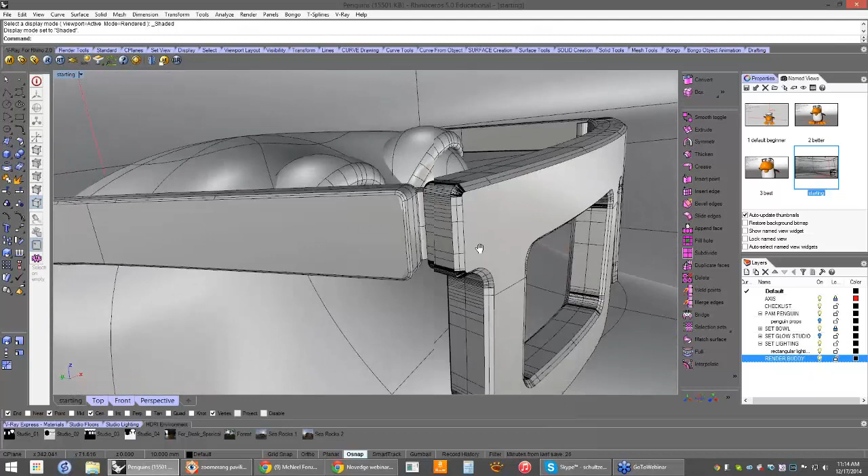For modeling, I'm going to switch to shaded view here, and I want to talk about having edge fillets. This may seem like it's not that important, but it's a very common beginner mistake. You'll see these little chamfers I have—they're not that big, but they're actually critical. Any product that's going to be manufactured will have fillets on it. People may not realize that, but the reason is the tooling would just break or not work, or if it was manufactured, you might cut yourself.

So there's practical reasons, but for rendering reasons, this is what's going to capture highlights. You've got to have fillets or chamfers—either one will do the job.

Okay, the next thing before we render is the presets. I think along with the Express toolbar, these presets are just amazing and a huge time saver. So let's go back over to the V-Ray options—these are located up here. This is brand new to V-Ray 2.0, and they've been improved with some of the service releases as well.

So we have presets for camera, interior and exterior. I'm going to ignore all those and only focus on general. The rest of those settings I've got a couple things memorized, and that will do the job.

So general will control quality, and if we do a quick preview, you'll notice this will be done literally in seconds—I don't care how complicated your scene is, this will go really, really fast. And a lot of the time that's just fine to get a feel for the camera setup and angle, and maybe the lighting. You don't really need finished quality to do preliminary tests.

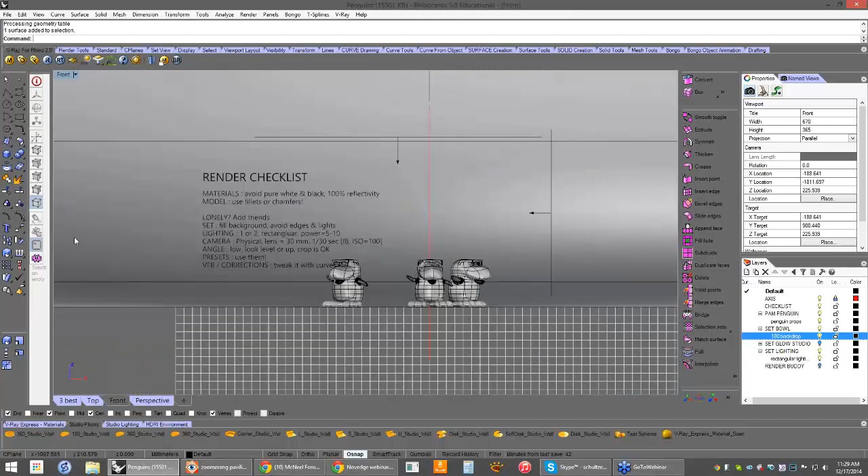The other thing I want to mention is the lighting. There's a couple things that control the lighting. Actually, let me jump back here to perspective - this might be an easier way to see it. So you'll notice I'm using just rectangular lights.

This is by far the best way to go. I notice beginners sometimes use spotlights, which are the cone-shaped lights. I find those a little bit too harsh, and these rectangular lights look way more realistic. Also, the bigger the light, the bigger the highlight - you want that highlight to wrap across. Imagine this light if it was just a very small rectangle, a square, or even a point.

You would get an equally small point reflection, so that's not going to work for most objects. You want to have a large source. You get a large reflection that wraps around the top of the character or object, and you get soft shadows. So it's all fairly important.

The other thing is placement and power. You might have noticed I've got this light selected. If I go over to the Properties panel and select the light, this comes in as default 30, and a lot of people don't even think to check that number. So I always put mine around 8 or 10 for the key light.

Equally important is your fill light, which is on the side. I make it half that. This is a great, simple rule of thumb to use. So 8 and 4 will usually work really well, but I could live with 5 and 10.

So let me talk about the placement. We talked about the power and the type. You'll notice that this rectangular light seems a little bit close, so let me explain what's going on here. If we have a light, it decays over distance. Obviously, that's what makes it look realistic, like the real world. So what's going to happen is if it gets too far away, we lose that effect.

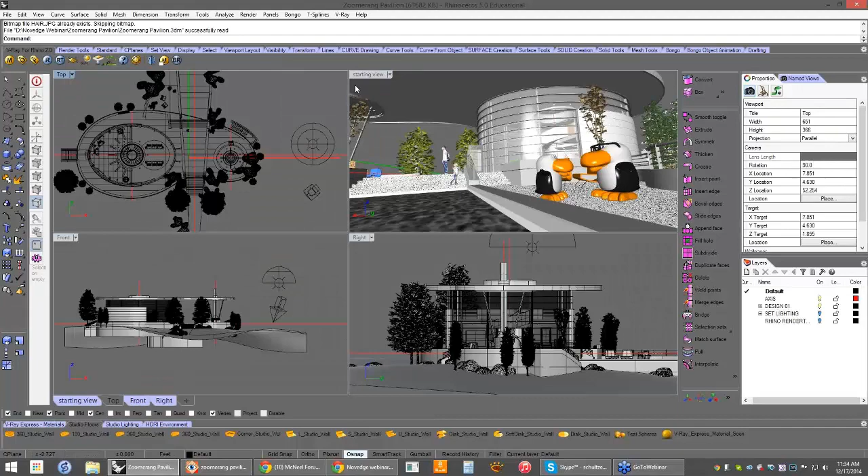One thing I've noticed is in architectural scenes, you can actually avoid putting fillets. I talked about how important they were. With architectural stuff, you can actually get away with not having fillets, and the reason is you're just not as close. So looks like our scene is finally opened up.

So let me show an example of what I'm talking about. We're going to come over here to one of these doors. Notice these are pretty sharp. I'm actually going to switch to a shaded view here—this might speed things up a little bit for everybody. We'll do some renders of this so you'll see all the final texture maps. So notice this is pretty sharp—there's no fillets whatsoever. But I'm not going to render this thing standing an inch away.

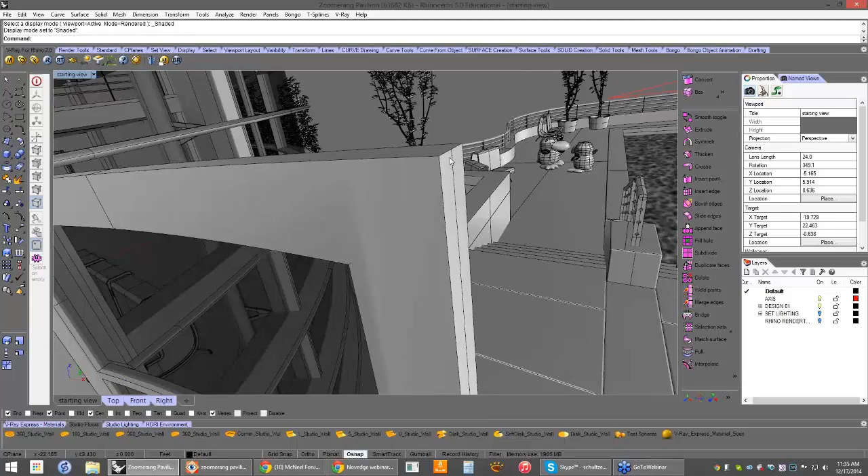Typically I'm going to be moving to eyeball level, and we're going to see it in the distance, and there'll be reflections and shadows, and that will work just fine. I wouldn't put fillets on there unless you needed to. I do have a technique for that coming up.

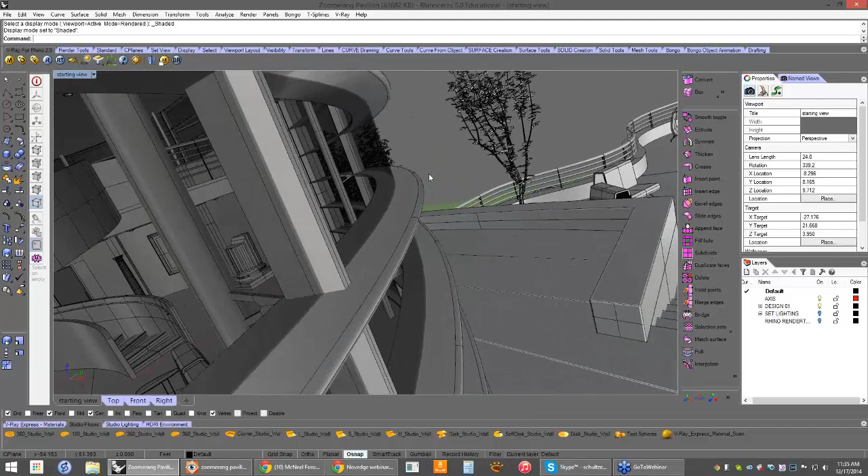Now, alternatively, there's this mullion right here, this horizontal mullion. That was pretty important. I wanted to get a nice highlight on there, so I did put a large kind of blend-type radius on there.

So this is called, if I didn't mention it, the Zoomerang Pavilion. This is a personal project, designed pretty much just as research and for the Lynda course, trying to do something crazy.

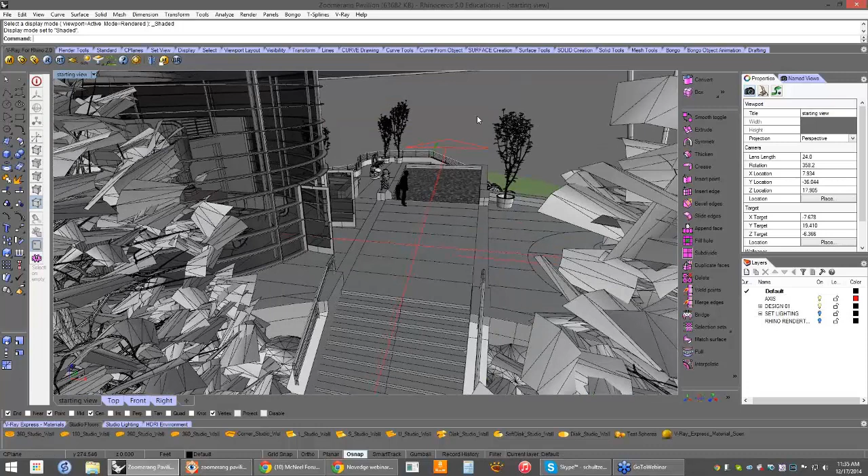The other thing we mentioned is the fillets, and also I'm going to call this just being sloppy modeling. I'm usually pretty careful with product stuff, but for architecture, most of the stuff is going to be hidden, kind of like on a studio set. So you'll notice if we come to the bottom here, there's just a lot of junk floating all over the place. That's totally cool.

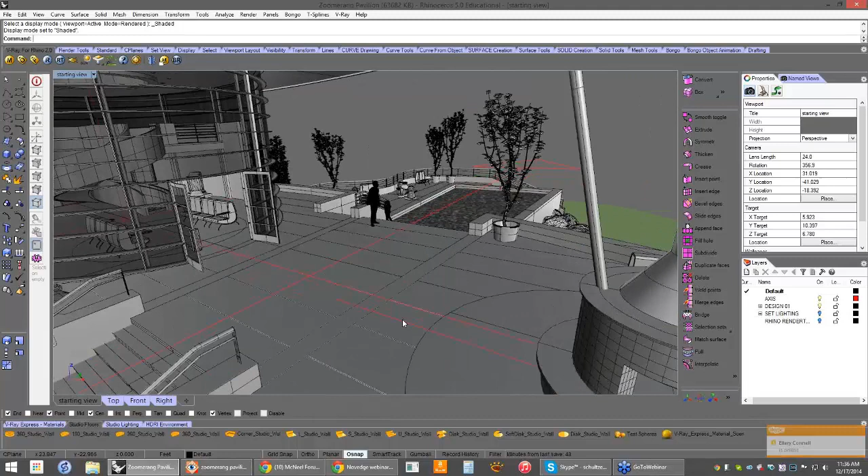If you don't see it, don't sweat it. You can save yourself a ton of time. I don't need to make everything nice and tight. You're not going to build typically from these files, so you're only concerned with making them look fantastic and render well.

One of my other modeling strategies is you should set your rendering up, have it look good, but you can do so much more in Photoshop in what's called post-production, and I'll show you examples of those. We'll be looking at a lot of renderings, but it's going to be towards the end.

If you want to change the intensity or add a different background sky, or even put streaks of light from the sun, all that stuff is best done in Photoshop. So you definitely want to work smart, not hard.

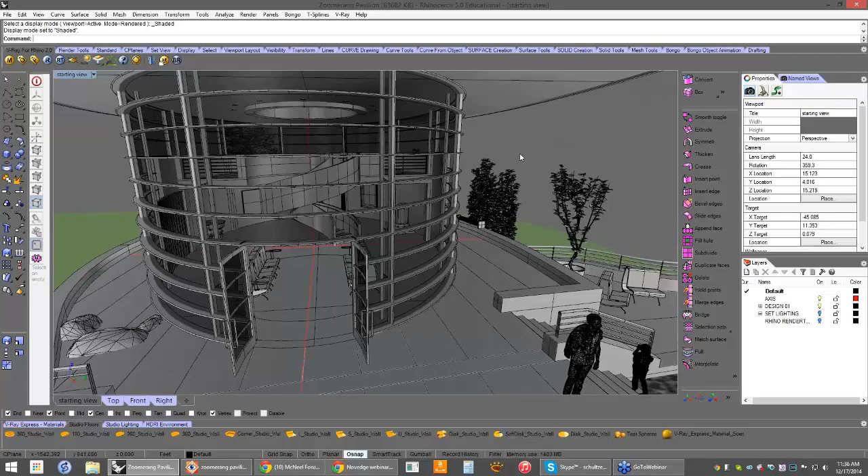Now that we've got the tour done here, let's talk about some of the V-Ray settings I'm going to be using to render this. Let's go back to the options here. We've got the same group of stuff.

However, I should probably talk about the lighting first. I'm using the V-Ray Sun. This is one of my favorite ways to do it. We actually have another method coming up, but this is very fast and accurate. So this is the sun, which is enabled. I want to make sure that is on.

This also works with two separate maps. The way these work is you want to make sure it says texture sky. There's nothing to see right there, but these three work so well together. We're going to have this sun which we can control and move, and then we're going to have a fairly realistic sky. It'll be up to you. There's other ways to do it if it's not to your liking, but I think for most preliminary and maybe many final renderings, this will work great. So I just want to mention we're going to be using that.

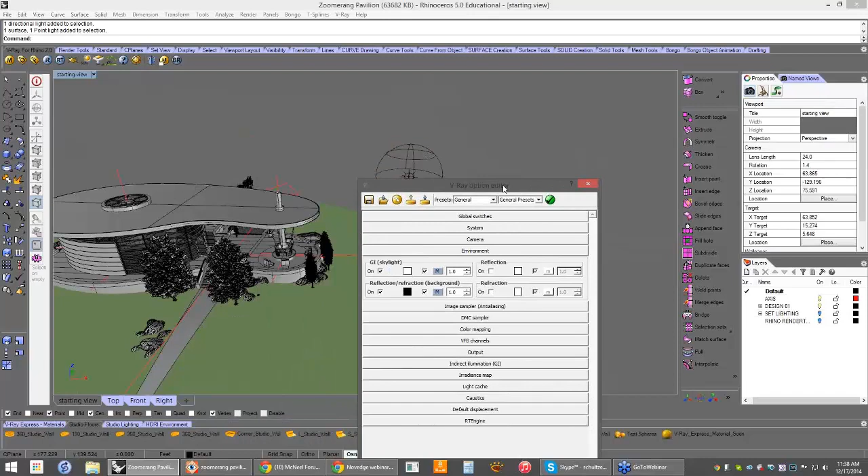Later on, we're going to be talking about this dome light. I want to make sure that's turned off now, because I only want to use one sun at a time. This is a little more advanced. So we've got the V-Ray sun.

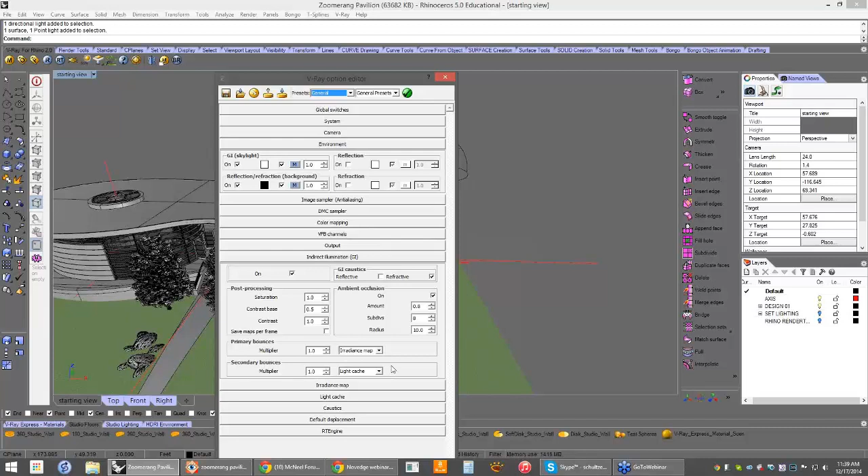In the prior renders, we were using—if I didn't mention it, it doesn't matter because it was under the defaults—the two render engines, which were Irradiance Map and Brute Force. Those work great for interiors. I didn't mention it because those were already set, but for architecture and exteriors, I'm going to use the same first engine, Irradiance Map, but the second engine I want to use Light Cache. This will actually give us a much better result. We're going to have hundreds, if not thousands, of light bounces, and in interior-exterior, that's what really takes you to the next level. So I recommend just sticking with these two engines for all architectural work, and then use the defaults for the interior studio stuff.

Some other settings we can talk about is the camera. Again, we're using the exact same stuff: f8, film speed 100, never change them, leave them alone.

The shutter speed, though, I've sped up greatly. So you'll notice that when I was in the interior, it's about 30. When I'm exterior, I'm about 300. These are two nice round numbers. I may go down to 200 depending on what I'm looking at, but those will get you by almost all the time, at least when you get started.

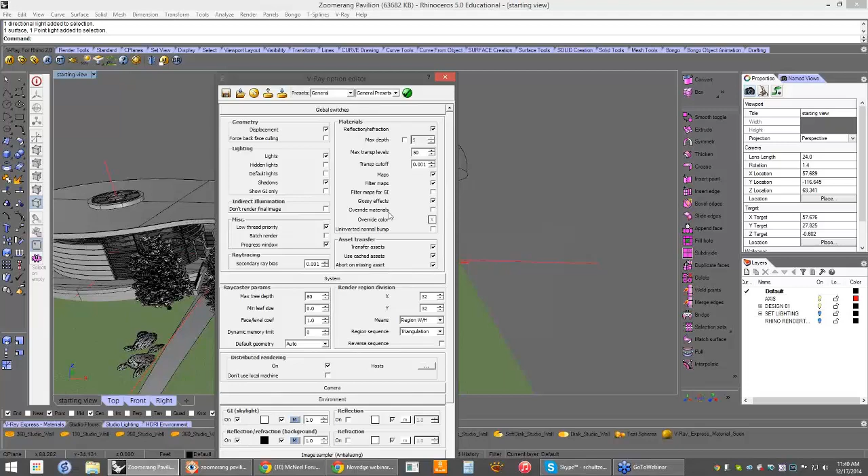Finally, I want to talk about one of my favorite new commands before we render. This is called Override Materials. Most people never even look here, and it's typically off. If I were to render this scene right now, it may take 15-20 minutes to give a nice, high-quality rendering. I'm not going to do that right now. Instead, I'm going to turn on the Override Materials, and what that means is this color has been substituted for every material in the scene, every single one. Therefore, we can get renderings in seconds instead of minutes or hours. This is actually quite powerful, just like the presets where we went fast because that was pretty good just for the camera and the light.

This is a very similar, tremendous workflow enhancement. I do want to point out that you can, on a case-by-case basis, have that override not affect some materials. So I've got the glass not overridden, because I think it'll be a little more interesting to see inside the building here. That's the only one. Everything else should be the same kind of flat gray color.

These are architectural scenes with a lot of detail and a tremendous amount of texture maps. But by using the override, we are going to get really fast results. I'll just get it going here. I think we've already checked pretty much all the settings needed. And you'll notice this is just ridiculously fast. I mean, this is halfway done right now.

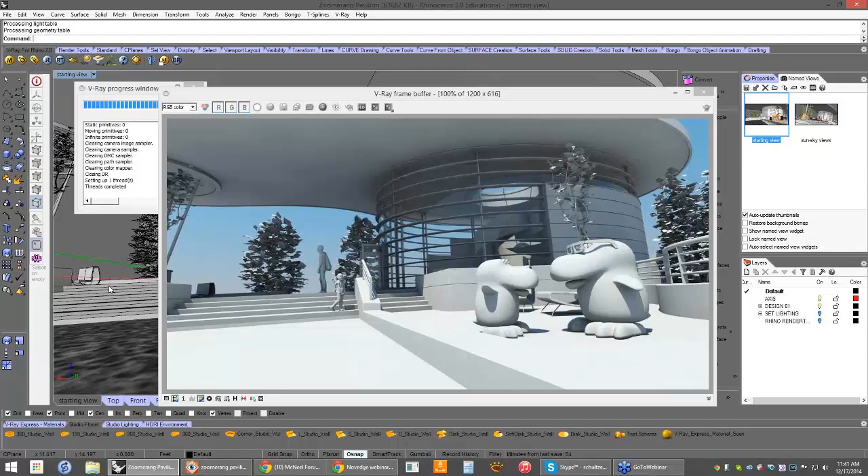It looks like those settings we discussed are pretty darn close. You can actually make some slight tweaks here. For example, I think I still have my curves on. I'm going to turn those off. So this is the render as it comes out, kind of untouched. This is right on the money. I've been surprised once I've learned these few little settings how well this has worked — pretty much just modify that camera for interior and outside, and then it works well for almost any environment.

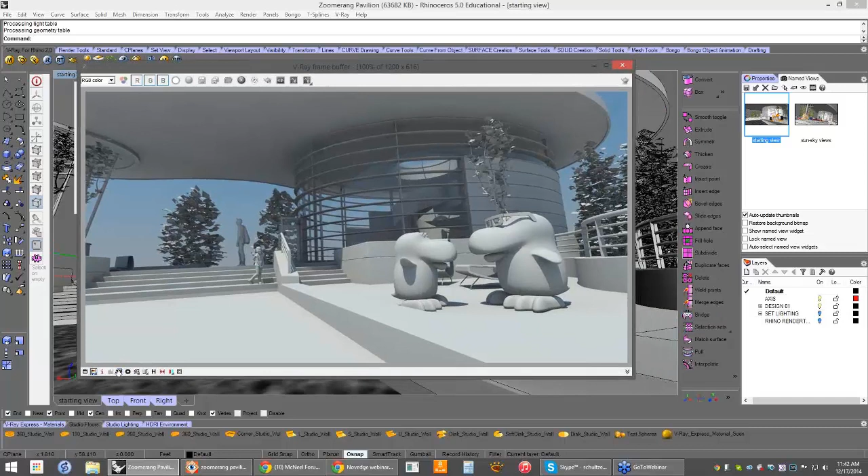So that's the material override. One thing I want to mention, since we were just looking at curves, is for exterior I tend to use levels. Let's open that up and explain what's happening here. I'm going to reset all of these so they're back to neutral, nothing's been modified. I'm not going to even use the curves — I tend to use those inside. I'm using the levels, and that is this dialog right here. Looking at the image, it's the same situation we had before. To me, since I've done this quite a bit, it looks really nice, really accurate, but a little flat.

You'll kind of agree with me after I make the change. So just like we used the curve, this is actually easier. We're going to make the brights a little brighter and the darks a little darker. We're going to move that information into the viewport. Super easy to do. So here's the after, here's the before — you can really pop stuff. I call this poppage, and that might save you quite a few renderings just trying to get it perfect. You don't have to; you can just use these enhancements. That's how people would take a photograph in the real world, and that's how they would edit in Photoshop. So you're just using the same techniques. It's not cheating — it's working smarter, not harder.

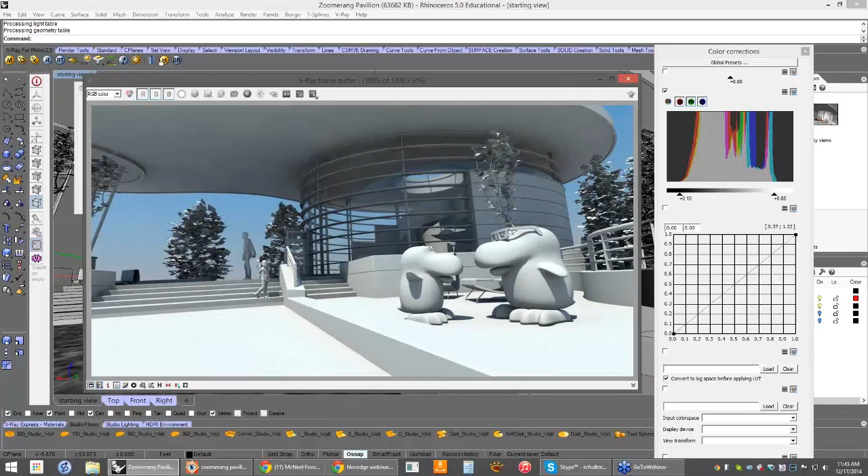Okay, typically if you're in the middle of a project, you have a lot of materials, and we took a peek there earlier. But let's say we needed to edit something, and I don't even remember what I assigned to, let's say, this chair. What material is that chair in the scene? So this is really cool — a brand new command that just came out in the latest service release. It's called Edit Material. I also call it the Quick Finder.

So when I click on this, notice that it's actually asking me to select it again. I did it in reverse order. So it jumps to the material editor — if it's closed, it'll open it up, and it goes straight to the material right there. So I can make changes to that, make little additional tweaks. It'll do that for any material in the scene, anything you can select. For example, here is a wall, and I can just do the same thing right now: select on the wall, right click, and then it should jump to it.

So you get the idea. I'm not going to... I think I've clicked too many times in a row, it's locked up a little bit.

Okay, so that's the edit materials, the quick finder. Very handy, especially as you saw when I had, who knows, maybe 50 materials. This is especially helpful with people who aren't very good about naming. That's one thing I recommend, is have stuff that's logical. I see too many students with default material 1, default material 2, all the way down to like 40 or 50. That's just crazy. I think that's no fun at a certain point, figuring out. It's too much of a mystery.

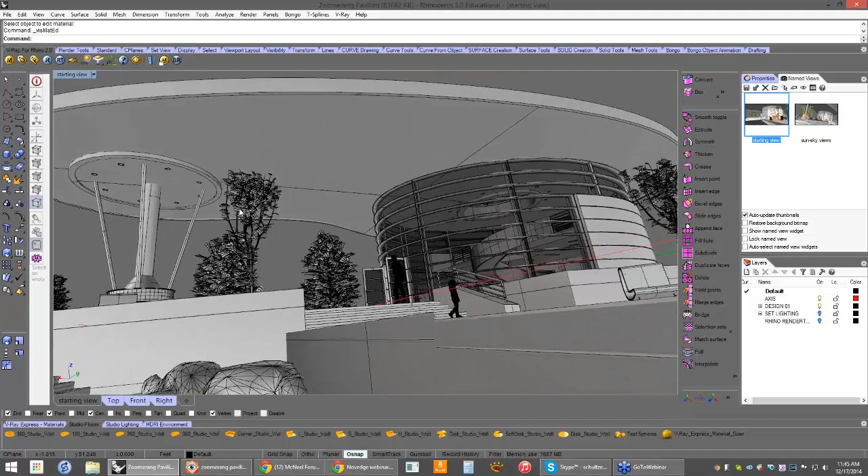Okay, now another really cool feature here, and I'm going to have to kind of jump outside of Rhino and V-Ray to show you, and that's this setting right here. It's called Guess Lens Shift. I want to give you an extreme example to highlight what's going on. This would actually be way more noticeable if we were looking at a high-rise building. Typically, in perspective, things get very small and pointy as they get higher, right? It's convergence of the verticals.

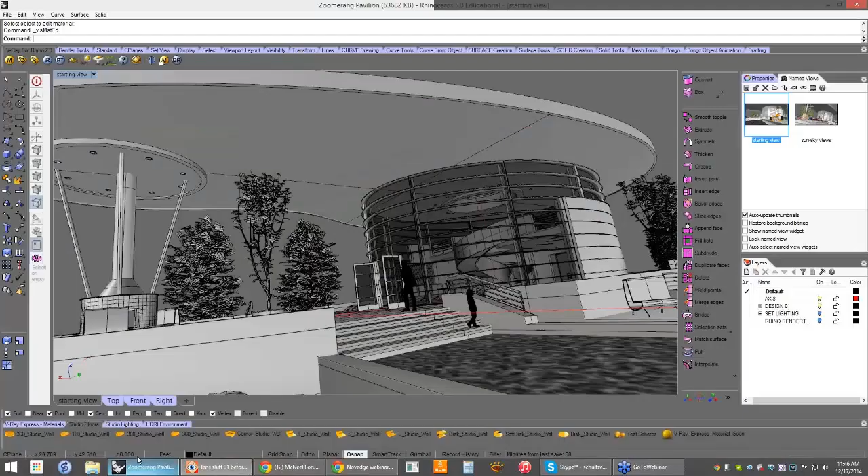Okay, so I'm going to jump over and just show you the before and after of how that works. This is called lens shift. Let me point out where it is first. So right here, here's the button, Guess the Lens Shift. It's going to become more dramatic as you have wider angle lenses. You could actually do that, maybe go down to 20 here. Hopefully you can see now that these vertical lines are converging. They're meeting pretty close, as opposed to where we prefer them having been more parallel. So that's what that command will do.

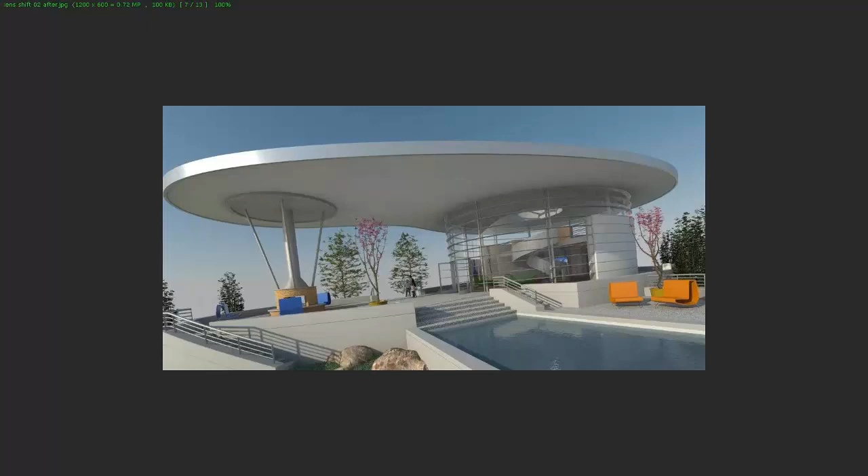You don't notice it in the viewport, it only happens when you render. So that's why I have to jump over here. So here is the before. We did the Guess the Lens Shift, and the next image should be after. So that's corrected - it looks a little skewed just because we're jumping back and forth. So that's the before, the lens shift, and that is corrected afterwards. I think that's a little bit more pleasing architecturally. A lot of photographers who take pictures of real buildings will want to do this in Photoshop, so now you have a tool inside of V-Ray to do that as well.

Okay, then last, for the render scenes here, let's get this out of the way. I'm going to go to a named view, and I want to render this view and show you kind of the alternative to the V-Ray Sun. This is the built-in one, or I should say the oldest, and it's kind of more standard.

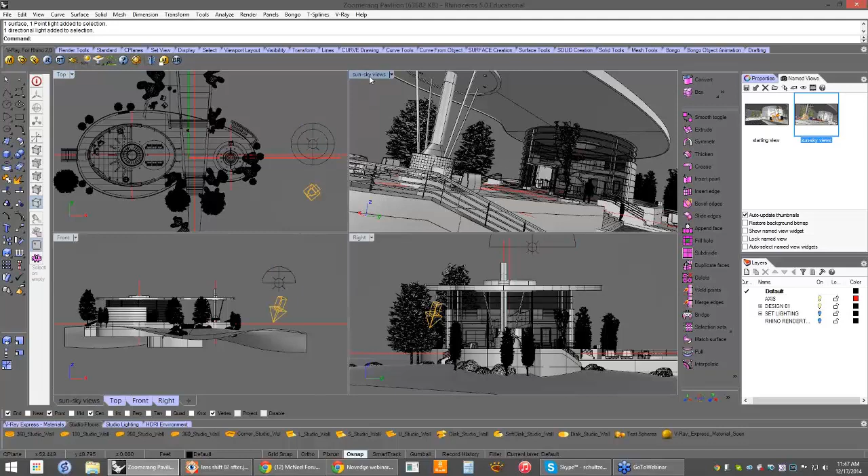Let's go ahead and render this scene with the V-Ray Sun, and then we're going to talk about the new and improved dome light and the differences you can expect from that. So I've got this highlighted, let's do a quick double check - this might be useful. I want to make sure my environment, that's got the settings there. Check my camera, a 1 to 300th, that should be okay or pretty close. I've got my output, double check that to match the viewport. That looks about right, I think that's it. That's pretty much 300th, I leave everything else alone.

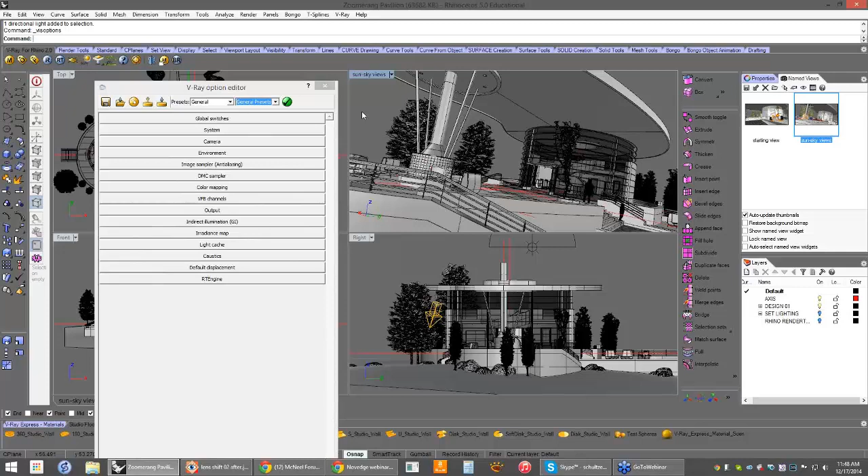We can double check the presets. I'm going to go very low just to keep this thing moving. That material override, though, is one of the things here that is really speeding it up. So you'll get to see the final renders here towards the end. Let's go ahead and render that.

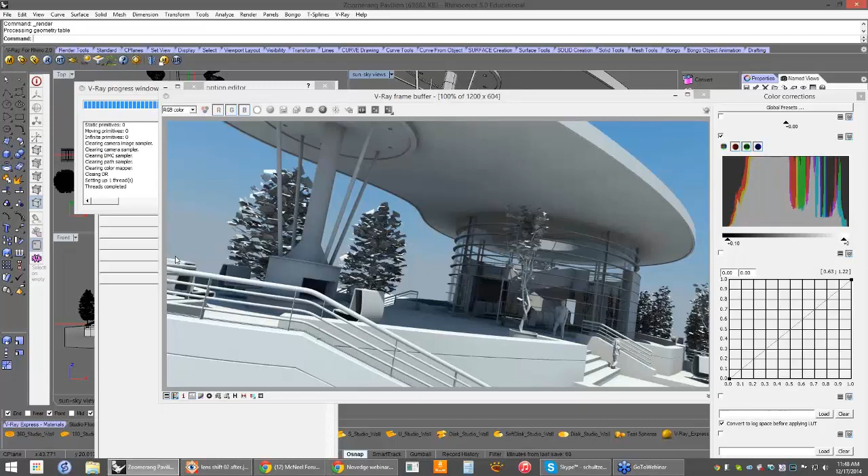So again, this is kind of a before and after. This is, of course, our override - I already discussed that, except for the glass. That's why it's rendering so fast. We do have the combination V-Ray sun and sky working really nice, that blue is really popping. I don't think we're even... yeah, the levels are being used there from the last rendering, we can turn that off. So that's just going to be a comparison render.

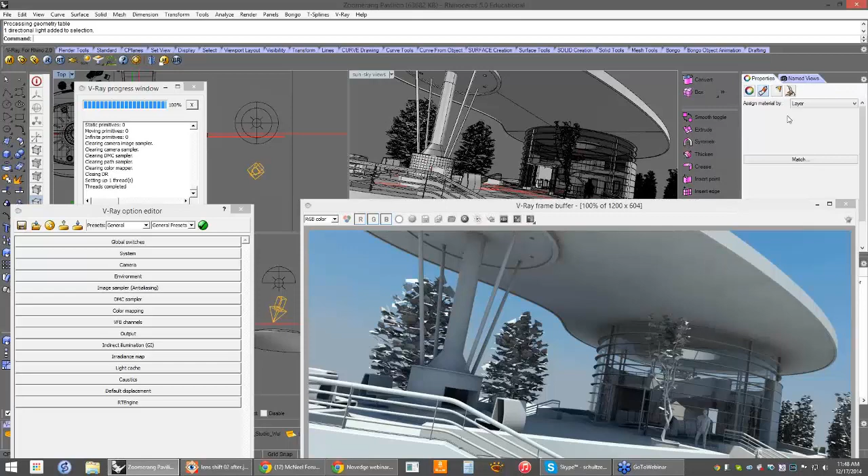Let's talk about this new technology. First, I'm going to take the V-Ray sun and turn it off. Let's do that, pretty easy. I'm going to select the sun there in the scene, go to the light, and just turn it off. It's off. However, it is connected to the environment stuff, so I'm going to turn off those as well.

These are not needed, so that includes all the light and those specialized texture sky maps. Done, those are fixed. Now we're going to talk about the dome light.

These are both on the V-Ray panel here under lighting, you can find them. What's amazing is that once you put it in the scene, these are icons, so it doesn't matter where they go, just make sure they're not upside down. So those are in the scene anywhere, simulating the sun millions of miles away, so it's not a problem where it's located.

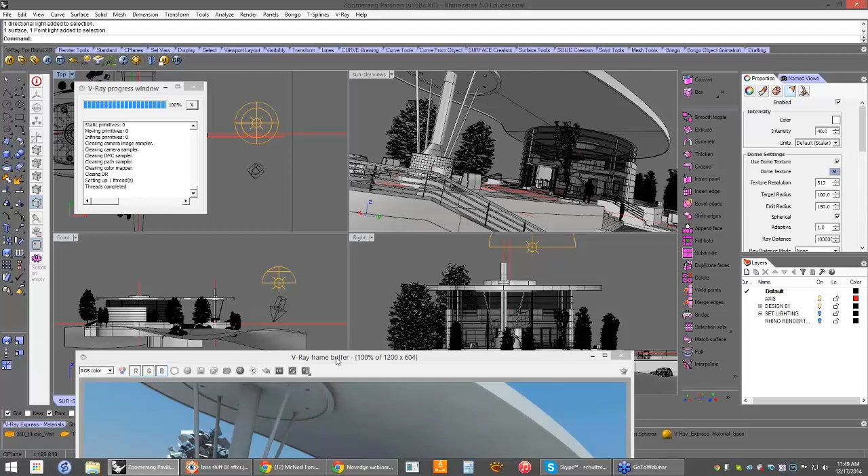But let's talk about the settings here before we do that next render. I'm going to enable this. Now we can apply a texture map to this dome. So what happens is we're doing multiple things at the same time - we're providing a source of light, and also a source for the background. This can get really amazing and very realistic.

Let's take a quick peek at the texture map here. It's just a standard bitmap, nothing special. It is an HDR format, which contains a lot of extra data - high dynamic range compared to your average JPEG. This is how it looks, a little bit dark right here, but that's fine, we're actually looking at a tiny slice of it. It's wrapped around this entire dome. So you just think of this as like a window on your house - you're only seeing a small section.

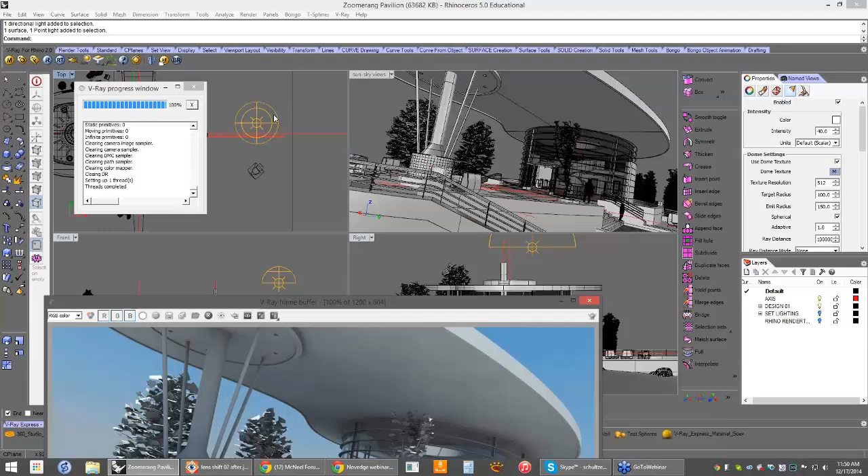Okay, so we've got that activated. One thing you want to look for when hunting or purchasing maps is that these guys are high quality, so that the sun - there is a sun on this map - can cast a shadow, and we'll see that happen right now. Let's go back to that saved view.

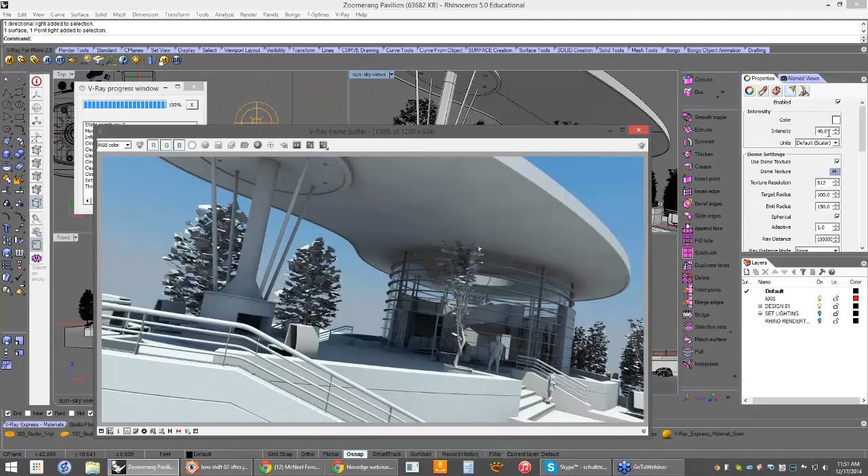It does take some trial and error, though. I've used these HDR maps anywhere from a value of 1 or 2 all the way up to 40 or 50, so a little bit of trial and error. It depends on who made them and how precise they were.

Okay, let's, without any more discussion, just render this. I'm going to use a little bit of a shortcut this time - by clicking on the teapot, I don't have to go over to any of the other menus. So this should go pretty fast. The dome light will be slower in general, just because it's a little more data.

But what's saving the day here is the override material. Now this looks a little darker - that's perfectly normal. We can make a very quick change, but you'll notice the scene suddenly looks like it's somewhere besides a computer. You'll notice we got the sky. The sun is actually to the right behind my shoulder.

But what is a mark of a great HDR lighting map is you can see sharp shadows. There's actually just a spot on this map that represents the sun, and it is casting light strong enough so that your shadows show up in the scene. That's pretty nice and something that's really critical. Notice how this shadow here is from the roof edge, which is farther away, so it's actually softer. It's another huge thing to look for and another step up in realism.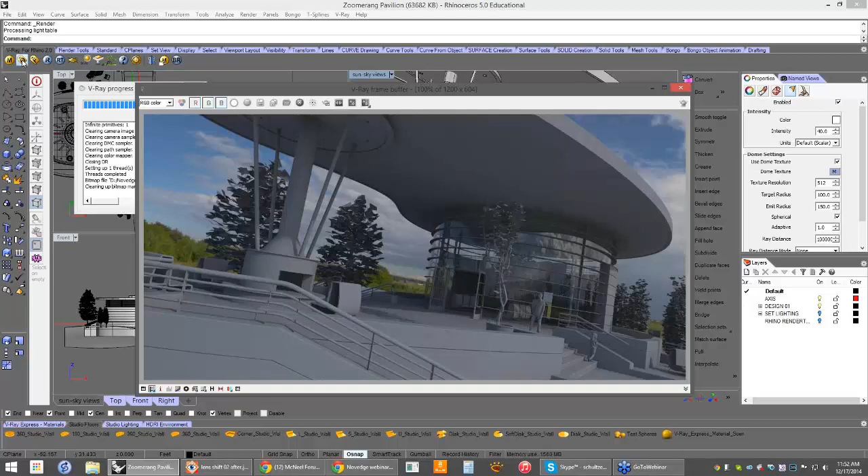If I were to tweak this, turn off the levels there, I would say this is too dark. Easy to fix, we only got one thing to change - we're going back to the camera. Instead of a 300th of a second, we need to slow it down, maybe a 200th of a second. By the way, make sure your exposure is always on - if this is off, then everything's pretty much ignored. So I made that one change. Let's make sure this viewport's selected, which it is, and re-render.

Again, this will go pretty fast. I'm looking at the time, so what I'd like to do is show you the final full color renderings here now. We'll jump over to those.

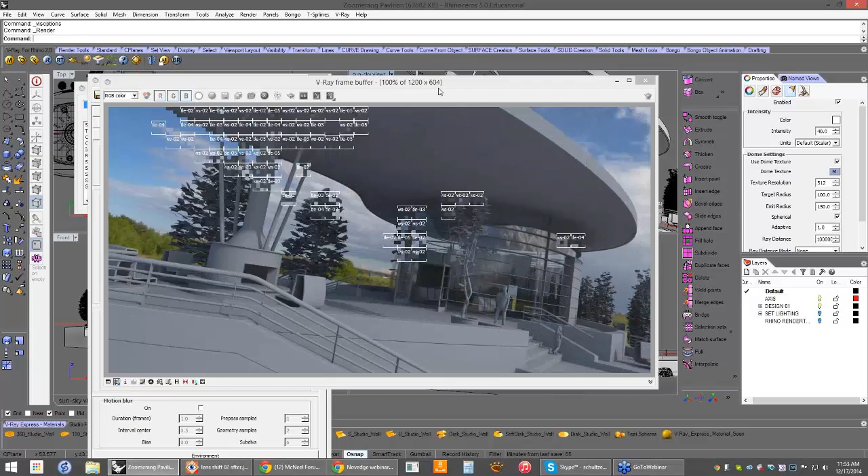So much better exposure - it's actually, I would say, fairly flat, which, as I said earlier, is perfect. So I'm just going to use my color corrections. We're going to use the levels, and right away we can brighten that up a bit or darken it up, and then check the before and after. So there's the original, which is accurate but flat, and here's the one we enhanced just a little bit. You do have to be careful, though - sometimes you can get too bright and the sky will tend to disappear. So that's a thing to look out for.

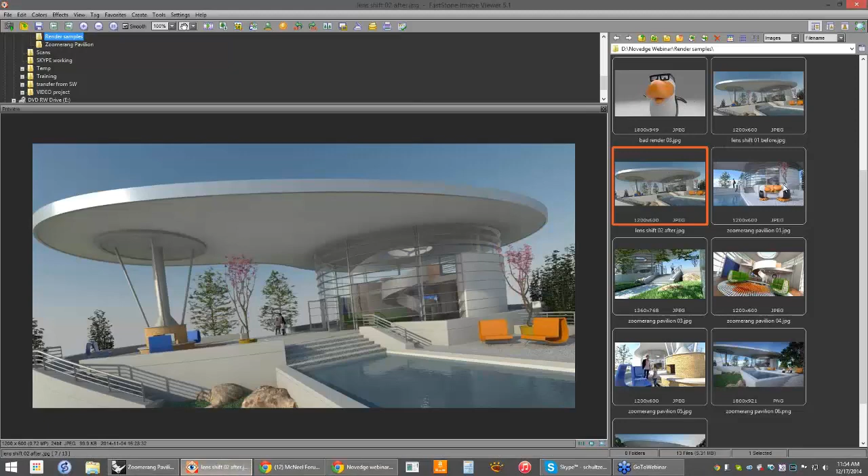Here is one of the scenes with all of the materials. One reason I love that material override is it saves so much time. If you look at this, almost all these materials in this scene have bump maps or displacement maps, and those take a long time. Not to mention the material maps on all these objects take a long time to get in the scene and load. So here's a nice final image.

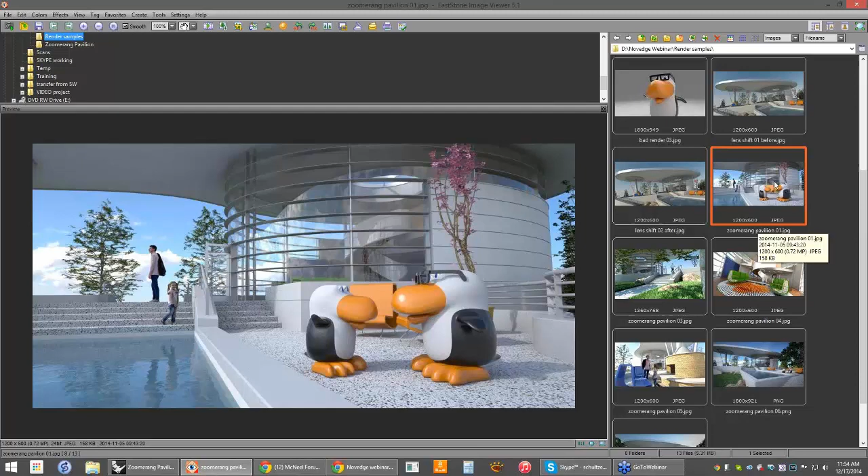Here's a shot from the front door. I always use three-dimensional people if possible. I know in the past many people have used little cardboard cutouts. I think the technology is there where you don't have to do that. That's kind of a hack, and it's not worth the savings. It does render a tiny bit faster when you have the cardboard people who are flat, planar, but I just use 3D people from now on.

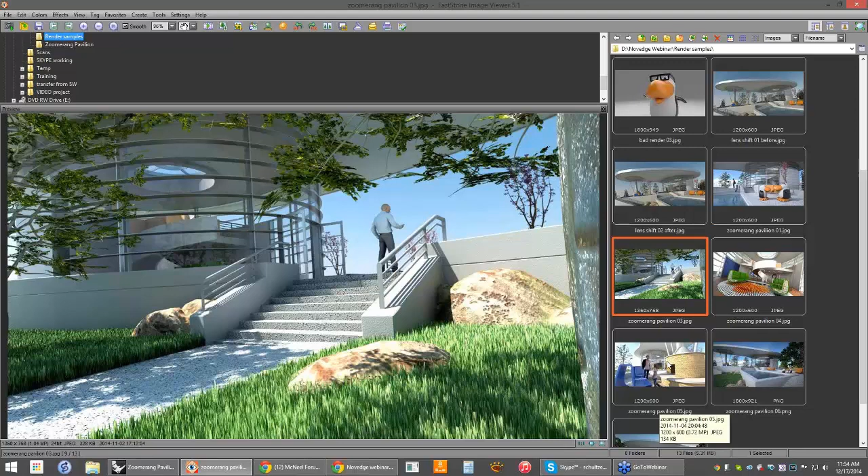Here's another example of using the 3D people. I don't have to worry about the angle, like I said, but also they're interacting with the scene, and that's really important. So that's one of the reasons I use three-dimensional objects like people and trees—they can interact with that scene.

This rendering is kind of interesting because it's got some depth of field. I love this—it's one way that can make the renderings just go over the top as far as realism. You'll notice I'm kind of focused on the little girl. Her father is a little bit blurrier, and as you get farther away, that structure is blurrier more. So just a little bit of depth can make things look so much more real.

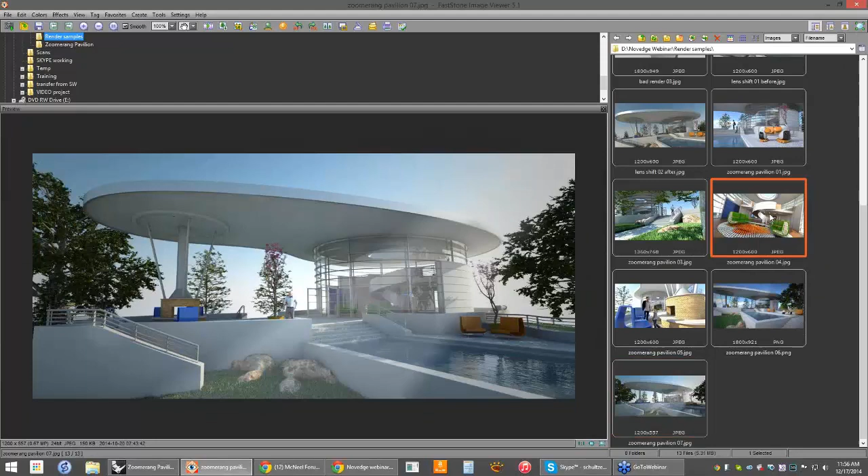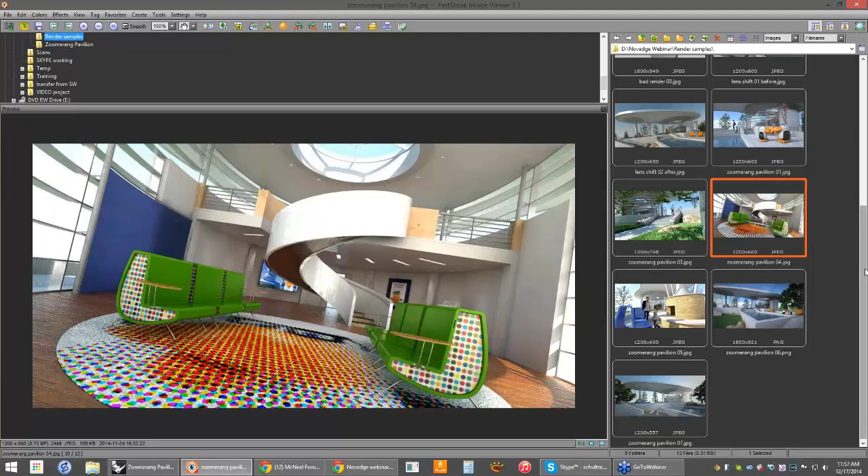So that is, I think, all the highlights that I had planned for today.

Oh, one more thing—I'm going to throw in a little bonus thing. Okay, so I think we have time. No one's telling me not to, so I'm going to go ahead and do it. No, do it, Dave. Do it. Okay, yeah, we've talked about...

Techniques to make architectural scenes more realistic. One of the things I run into is CG stuff can look flat, especially in areas of high detail. It can get washed out—there's a tendency for this in all rendering engines and all 3D software; they just flatten out. So at a certain distance, these details might just disappear.

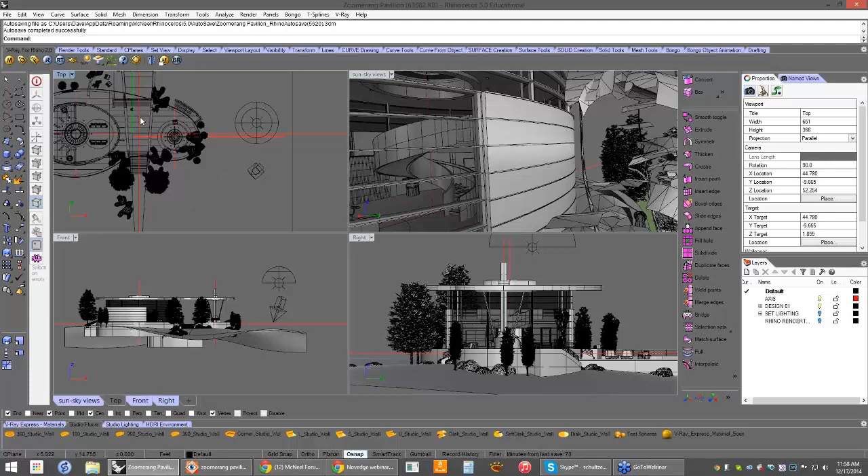So it's a great new feature. It's been in V-Ray for, I think, a version or two. I just didn't notice it, so it's one of those overlooked things. Let's go show you where it is. This is called ambient occlusion. I believe it's here under indirect illumination, and these are all the default settings right here.

I'm going to show you before and after that are already pre-rendered, but to use it, you just turn it on. These are the defaults - that's pretty much all I've ever done. So what this does, if you analyze the strange name, it takes a calculation. Let's say you're a little pixel inside this groove - it determines how blocked you are from the sky. So ambient light is the sky, occlusion means blocked, and then it increases some intensity values. It makes it enhanced, so smaller details or things that are blocked become enhanced, and that tends to compensate for this tendency of all CG renderers to flatten things out.

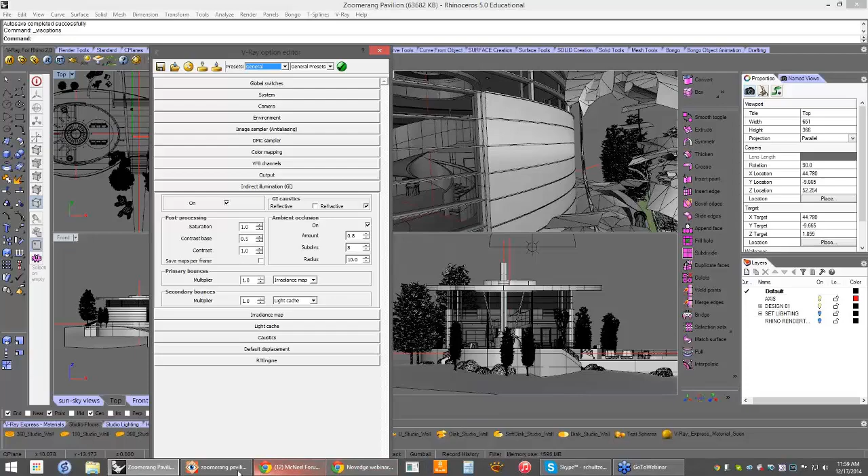So let's look at those - those are already done as well. I'm going to zoom in here. Now this is without ambient occlusion, so you'll notice in the grooves we were just looking at, some are dark, some are light - they're a little bit spotty. That's one place to look. The other place to look is areas that are kind of in intersections. These are just nothing special happening there.

So let's go to the next image where I turn it on, and hopefully you can see that everything just popped. These grooves became noticeably darker, this edge became enhanced, and even things inside. Let me just redo that - so here is before ambient occlusion. This is probably the most noticeable area right here. Here's after. Before, after - big difference. Didn't take any more time to render as far as I'd ever noticed. It's one setting, that's the ambient occlusion.

Fantastic, I use this for architecture all the time. It just gives you so much extra detail that you don't have to worry about, and it saves you time too in Photoshop with tweaking or enhancing, and that can be a losing battle too.

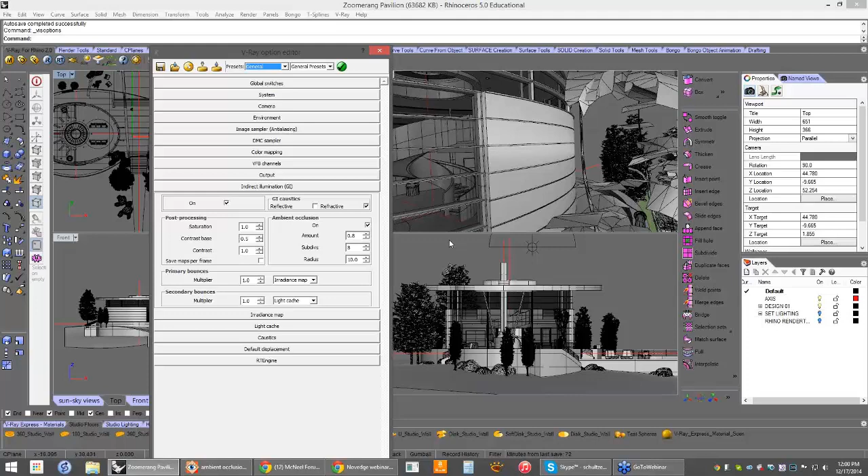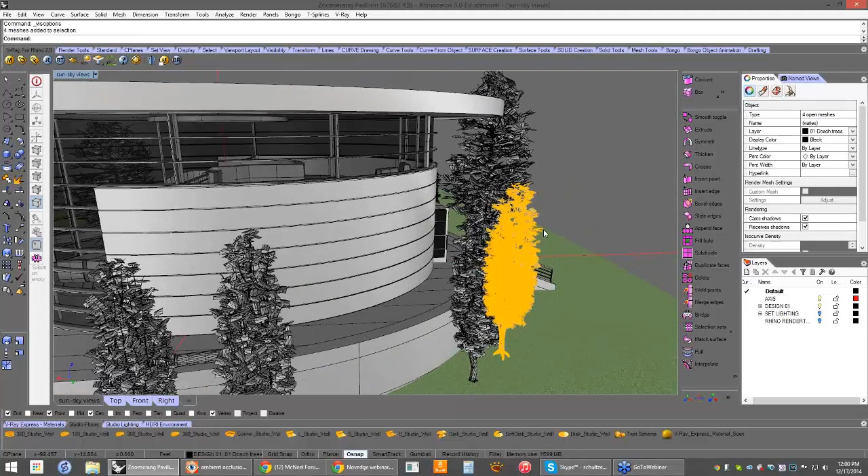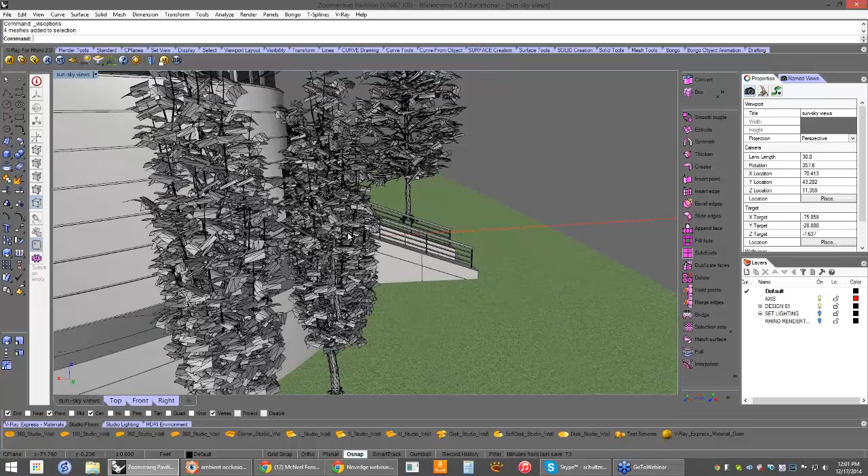Yeah, I've actually been using those quite a bit. I don't have any in here, so I'll just try to verbally describe the best case scenario. The classic example is using trees - this could easily be defined as a proxy. There is, it's right here, it's called Write the V-Ray Proxy. If I click on it, it would write an external file, and then I could start placing those by the tens or by the hundreds. They look a little bit funny, very sketchy, but that's actually how they're designed. The proxy is a memory saving technique, so that data is stored externally and only rendered when V-Ray is rendering those pixels. So it pulls the data in, and then it pretty much releases it. So instead of your file being unmanageably large, the proxies let you literally render a forest - you can put thousands of trees. So I do use those when occasion calls for it.

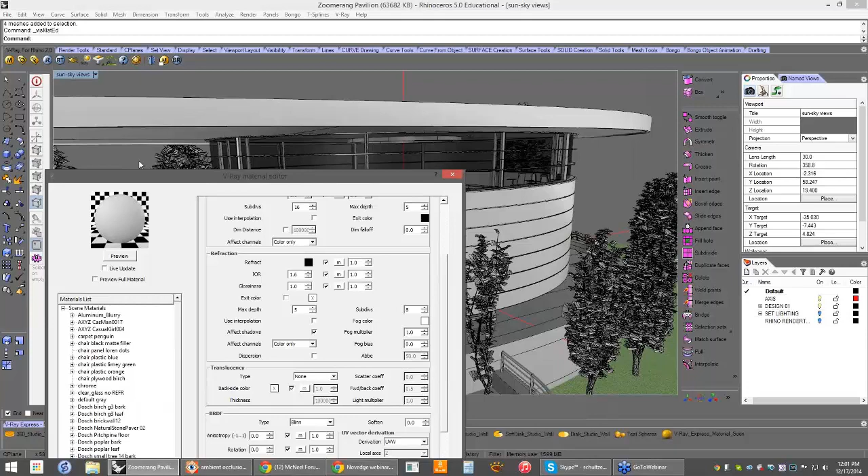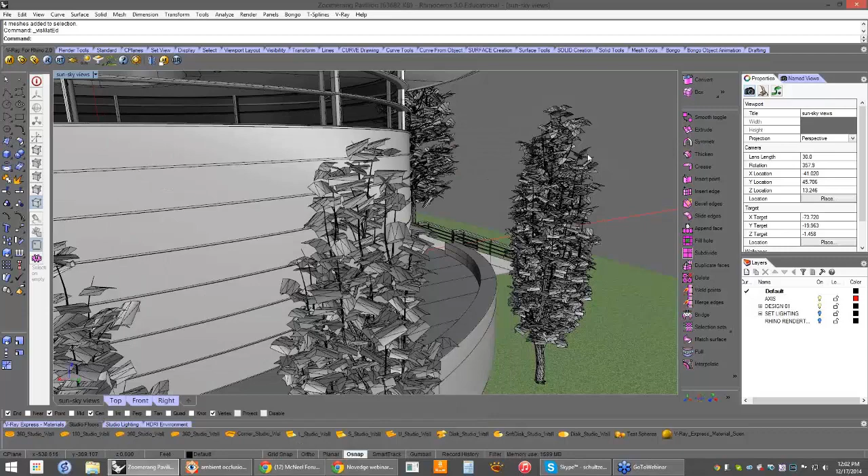One thing you got to watch out for is if I did have a proxy on here, it has what's called a combination multi-material, so that's something you never want to touch. To help V-Ray work during that process of rendering, it takes all the materials on the tree - there may be 5 or 6 or 7 leaves and bark and alpha channels, etc, and it combines them into one multi-material, which is kind of weird looking and, like I said, untouchable. So it'll fill up your material editor pretty fast, but it's totally worth it. Just something to look out for, and then you can render literally an entire forest. So that's kind of what a proxy is and how it works.

I didn't plan on talking about that. It's a little more advanced, but maybe you could throw that into a future webinar. Yeah, maybe next time - great idea.

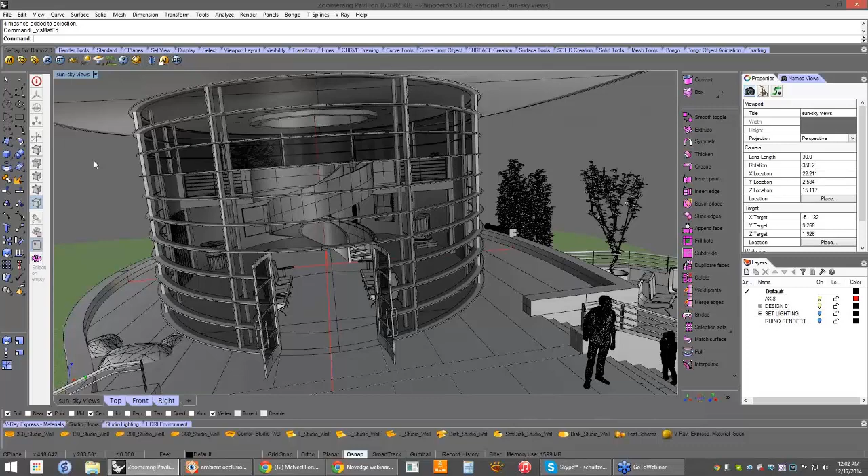Second question: which settings bring the HDRI to the background? Is this the GI skylight, as you have not changed the settings? Okay, I'm not sure exactly where that... All right, yeah, using HDRI background - well, there's so many different ways to do this. I could actually render this without either of the two suns. I never want to do that.

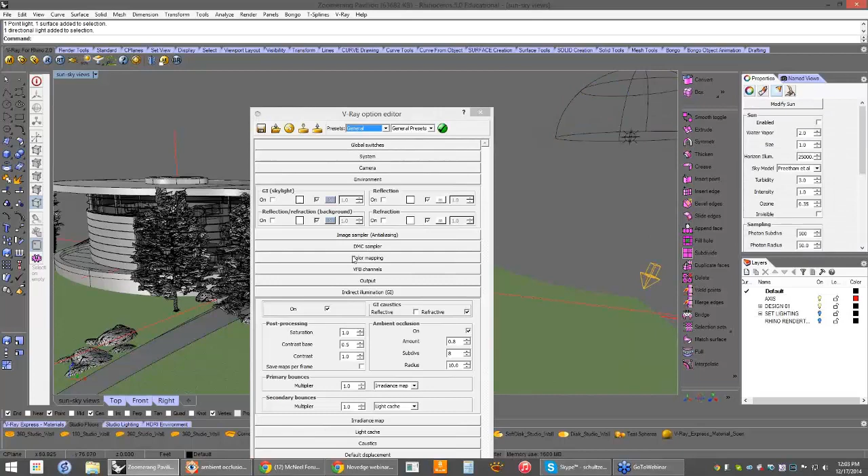I could light this with sun and then using texture maps. But more specifically, just to what we covered today, this image that's on here is an HDR image. So let's go take a look at it briefly here.

Here's the texture map. Now we can't preview much of it because it's wrapped around the dome. However, if I switch back to a flat projection, we'll be able to see the whole thing. So even though this is squashed, you can see there's a sun there, I hope. There's a sun, there's clouds, sky, and grass.

So you absolutely want to have this—any image used for lighting, you want to use an HDR format.

Here it is, HDR. So if you're not familiar with HDR, that just means there's more values beyond the standard 255 for RGB, right? Everyone knows how the color wheel works. You're going to pick RGB from 0 to 255, but that's so limiting compared to the real world. HDR lets you have literally tens of thousands of values of R and G and B, and the result is you get trillions of colors, almost unlimited colors.

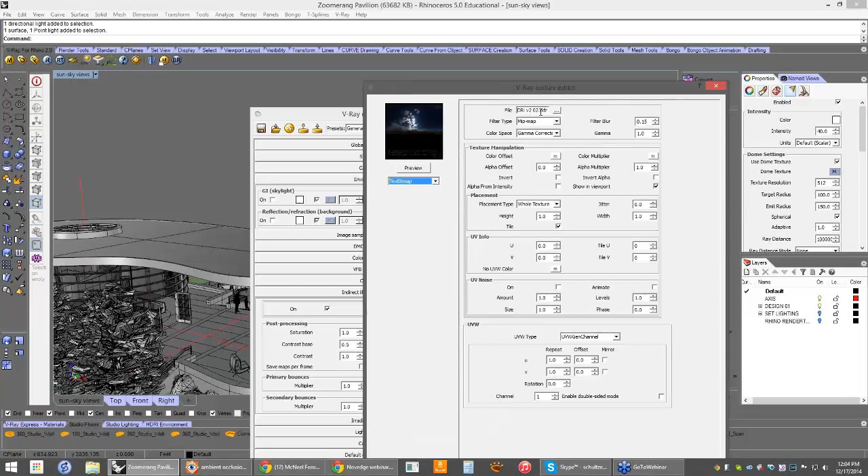And that's pretty much what the real world is. One example I've talked about in the past is, the 255 values is very limiting. So if you were to go outside, look under a rock, and then look at the sun, it's obviously a greater degree than 255 values could ever capture. So when you're outside, I use HDRs pretty much exclusively, whether they're backgrounds or being used for illumination.

That's really why I recommend this dome light. I'm using it for both illumination and to show up in the background. That's the beauty of this dome light. So I hope I answered the question.

Right, I'm going to move on. Questions are coming in right now, so I will select a few. Is it better to add sampling to lights or turn up the settings on V-Ray?

Can you say that again? I think I missed something. Is it better to add sampling to lights or turn up the settings on V-Ray? Turn up the settings? Oh, okay, I think I understand.

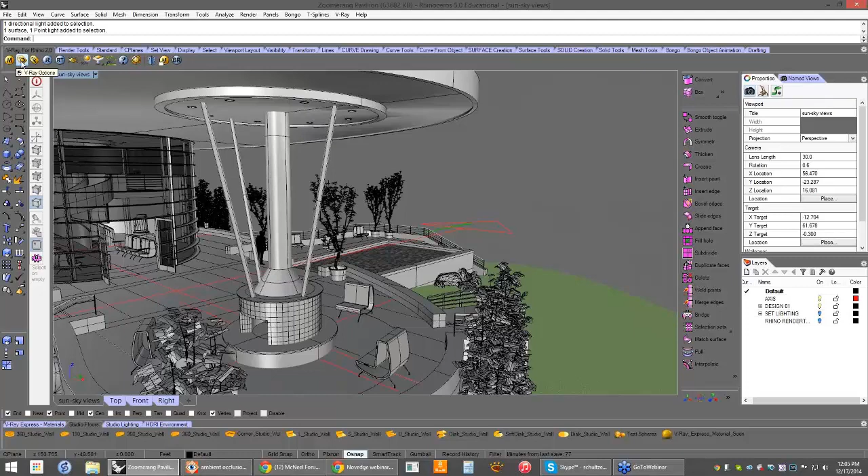Let me go back to the penguins—this is a way easier example. So from what I understand, let's go back to the props, let's go back to the best view here. So I think the question was, do you want to modify the camera or the lighting? That's actually a really good question.

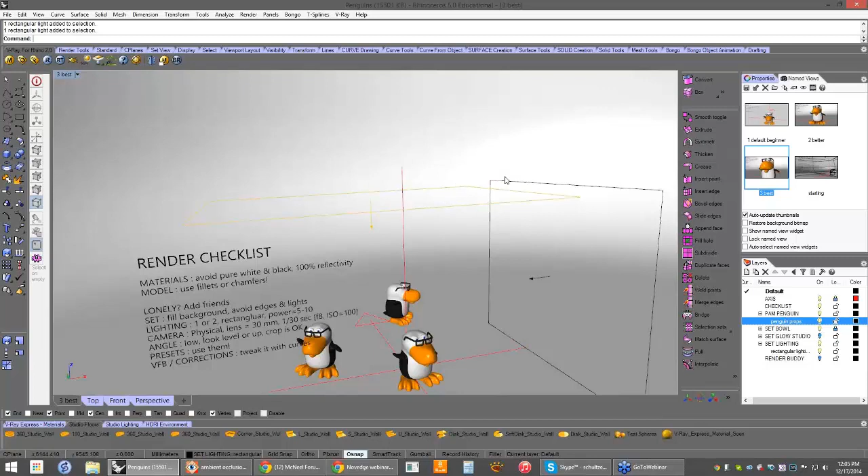I typically will use the same values here for the lights. This scene is 8 and 4 for the values. And it's something I didn't mention—it actually depends on the scene, it depends on how your test renders look. So I'll put it that way, that there's a lot of variability.

If you felt that the highlights are blowing out your very light colored material, then you can lower the intensity of the light, or move it away, or make it smaller. So that's important to know.

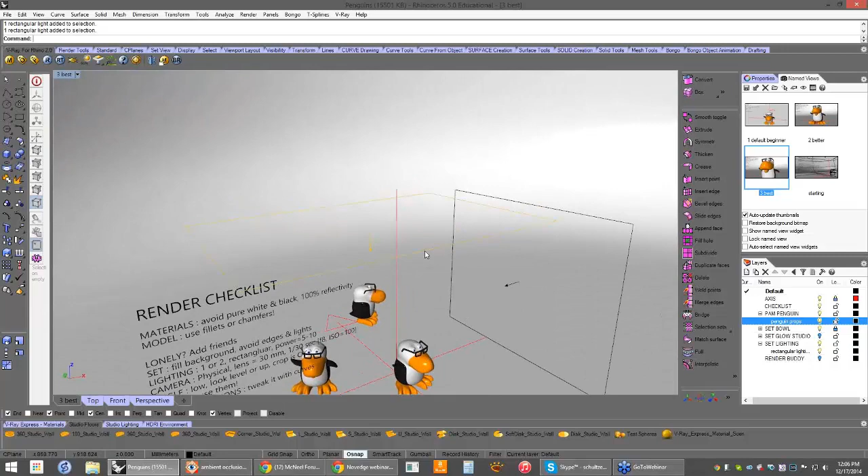There's 3 ways to change the light, 3 aspects of it. One is moving it farther away, like I just did there. Another thing is to use a smaller light source. I could scale it pretty easily—just snap on there, and now we have a smaller light source, so less light will come out. And then third is the intensity or the value of the multiplier here. So that's 8. It all depends on the object.

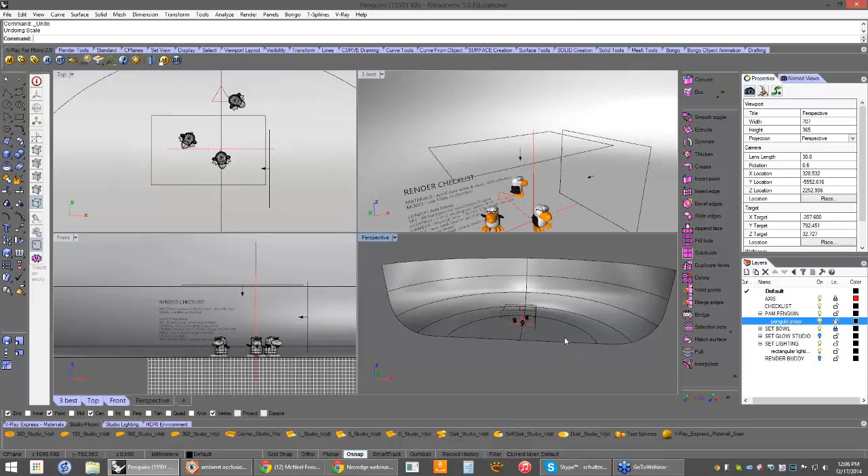Again, I'm sorry, I'm giving kind of an 'it all depends' type of answer. So I kind of get the lights doing what I want them to do, and then make the camera adjustments. But these settings I shared with you, they'll get you so close most of the time that I think it's really kind of up to you and what your goal is.

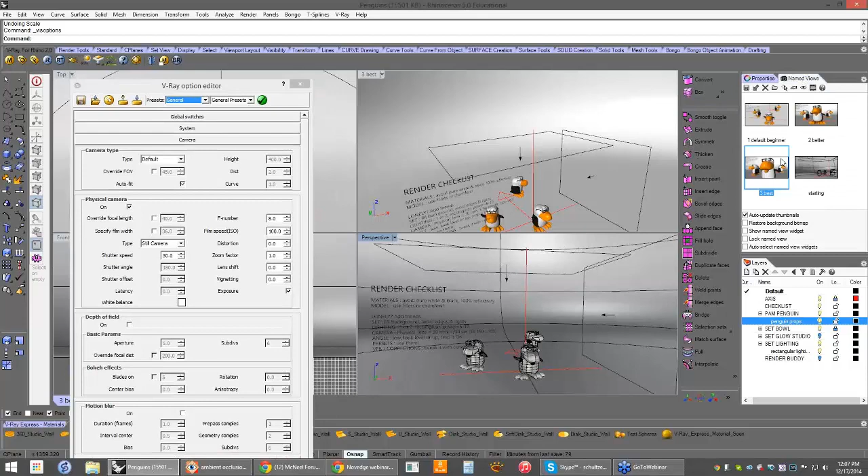So I'd say, if it's a super reflective material, I might be more concerned about how close and how bright the lights are. If they're more of a matte material, then the lights wouldn't be that critical, and I would probably be adjusting the camera exposure.

But still, compared to when I started, I was literally tweaking dozens of settings. So I think you guys are in good shape, just focusing down to 2. That's great.

Are you using a simple displacement map for the grass? And if so, are you using a noise pattern to develop the random blades? Yeah, I'm actually using an existing material.

By the way, there's a lot of things that go into this. Let's go back to the Zoomerang Pavilion—this may help. I'm using a material that comes straight out of the Express toolbar. I forgot this thing's a slow loader. It's on the Express toolbar, I think it's called N-grass. I believe it's under masonry here.

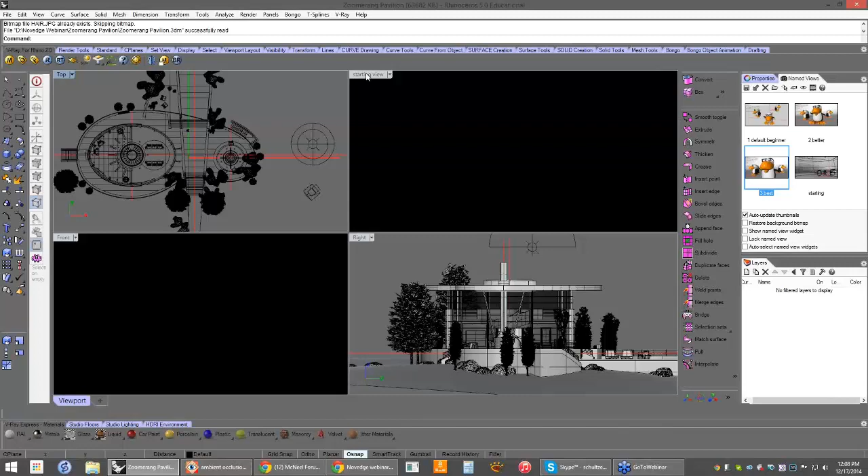Okay, it's got a lot of data here. I should have let it finish. Yeah, it's built into the Express toolbar, I think it's called N-grass, or just grass. And to answer the question specifically, yes, it's doing displacement.

But there are specific ways you need to apply it, and important ways you need to prepare the surface. I go into a lot of detail on this in the Lynda course. Let's take a look at the grass. I'm using a fairly large map, and I'm doing some repeats, but it's so well designed that you can see a little bit of the grass. Let's take a look at the material. It's called Grass N, I said N grass, sorry about that. So the key to realism here is displacement, and that's one of the reasons I didn't render this thing.

This displacement is going to be one of the more time-consuming things you'll ever want to do, especially with so many blades. But the technique I recommend, let's go back to shaded view here, is to use that material first of all, so we already know where it is. But equally important is to prepare the surface.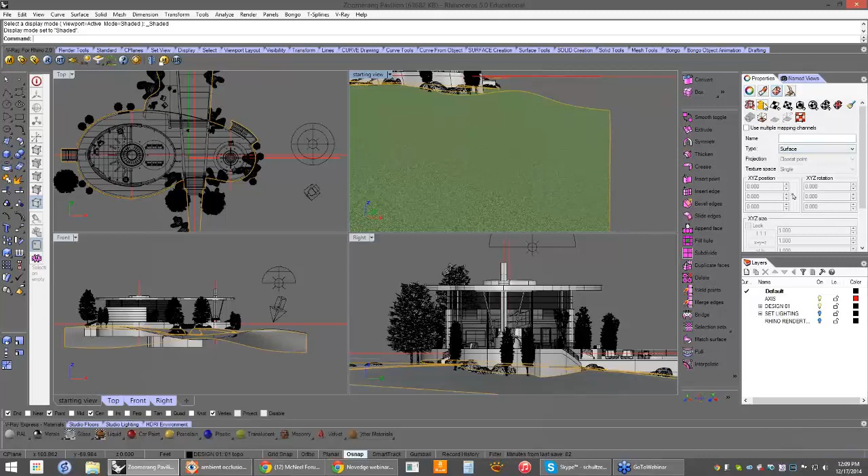So what I mean by that, let's see, I'm going to go to the object and show the ISO curves. Now hopefully... okay, showing them, here we go. I also want to go to shaded view. These texture maps are so large... oh, I've got the override on, so that's what's happening. Not a problem. So when I select the object, you'll see that these ISO curves are very closely spaced.

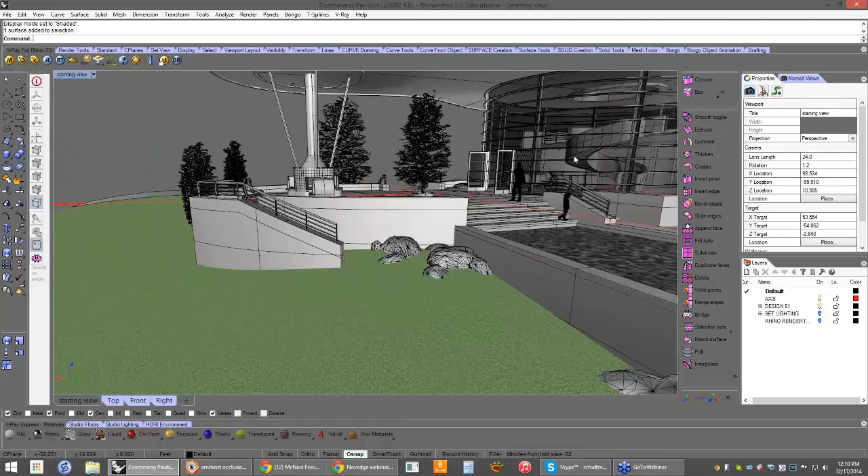That is actually done through the command edit rebuild on the surface. I just made a simple loft to get this ground in the scene here. I used about 6 or 7 curves, lofted them, pretty simple, pretty easy to do. The next step, though, is to rebuild it, and that just gives us more control points, which helps the displacement material push and pull the surface.

And the rule of thumb I have used is make sure those are about a foot across. If I hadn't rebuilt them, they would probably be 20 feet apart - these control points is really what we're looking at, control points of the surface. This is a very detailed surface, but it's pretty much necessary for the displacement to happen. So turn those off.

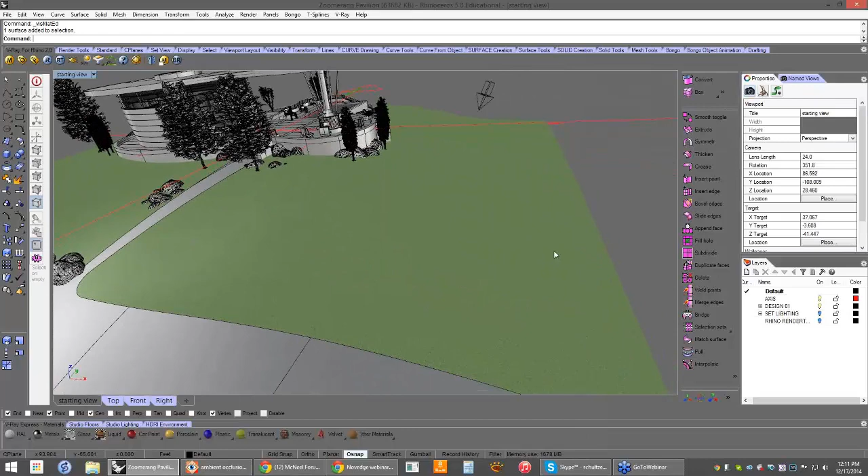And I think this material, if I go to my texture mapping, is repeating 12 times. So that map is probably filling in a space right about here, and then it goes 12 and 12. So it's a combination of the map being extremely high resolution, displacement being carefully calculated, and then that rebuild feature we talked about, edit, rebuild.

I'm not sure if I showed that - edit, rebuild, and you get this. So you want the U's and V's to be cranked up. The values may differ, I try to use numbers that get me to about a foot or less across in my scene. This is pretty important. If it was left at the defaults, it just wouldn't work nearly as well.

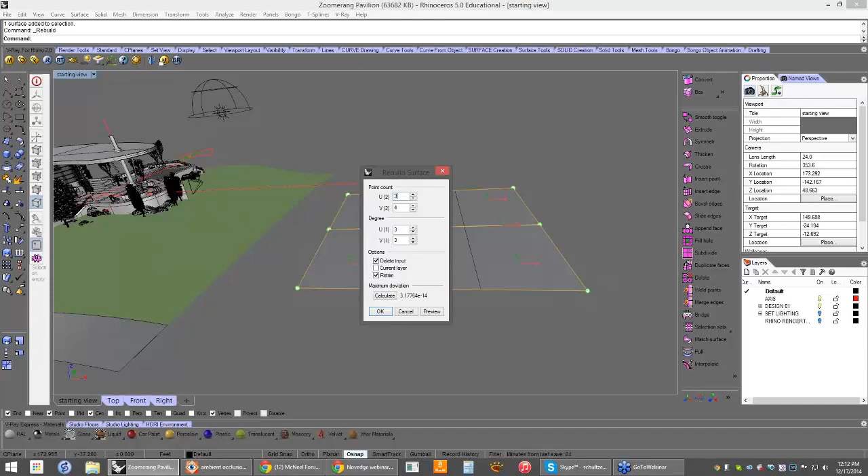I can give you a quick example of that. If I were just to take a normal surface, the control points on a quick, simple surface are only on the corners. This would be a horrible thing to do. So you could make it work fantastic with that edit rebuild, and instead of the U's and V's being the default values, I'll say give me 32 in each direction. Hit OK, and now with the rebuilding, that displacement's going to work way better.

Again, you don't want to have these things edited after, you just pretty much want to get your final design - it's too much pain to edit. Get your final design, maybe save a copy if you think you want to go back, and then do the edit rebuild, and then just kind of leave it alone. With so many control points, it's no fun to edit. So those are the keys for the grass and where to get it.

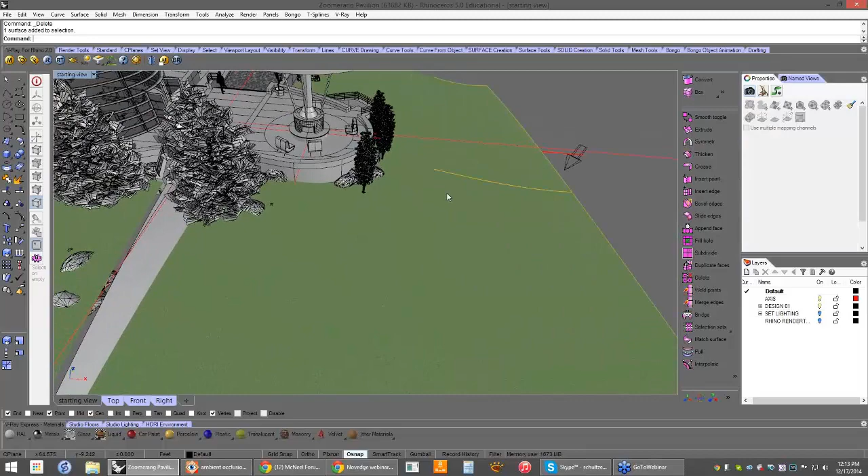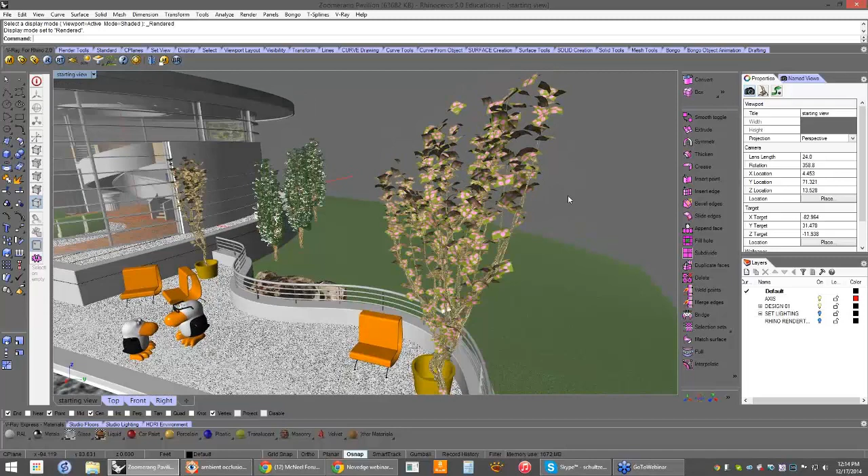These trees here, I've got to give people a word of warning. I get a lot of free stuff on the web, but it often has problems. So I recommend, if you can afford it, buying assets instead. There's tons of free stuff, which is great to learn from, but if you're doing professional quality work I typically buy stuff, because companies put so much time and effort into the maps, the geometry, the text, and how the maps are applied. That's a lot of work.

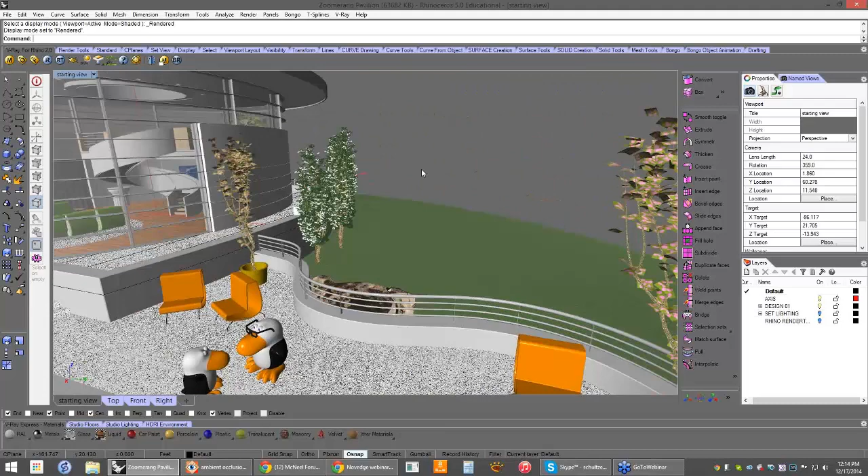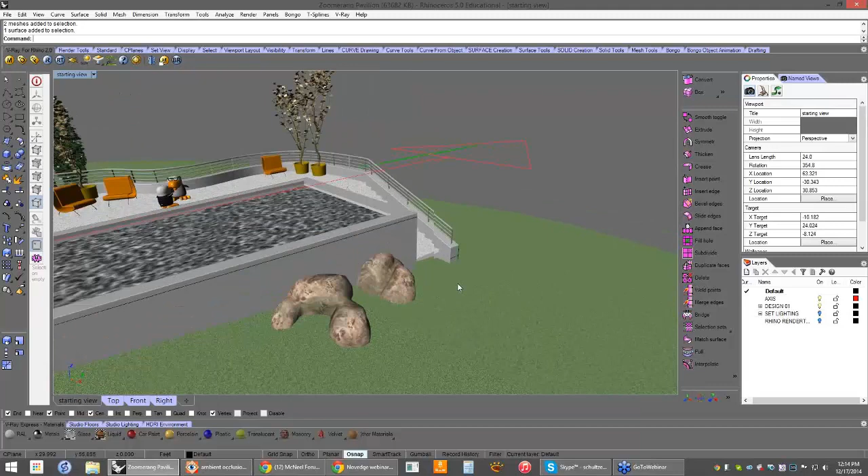So these are from Dosch Design, a huge company that does a lot of texture maps and 3D objects. I think all the trees in this scene, maybe three different trees, are all from Dosch Design. The grass I mentioned was built into the Express toolbar, made by the Chaos Group, the V-Ray guys. These rocks are actually from SpeedTree, though we didn't really have that, so I kind of pulled them out.

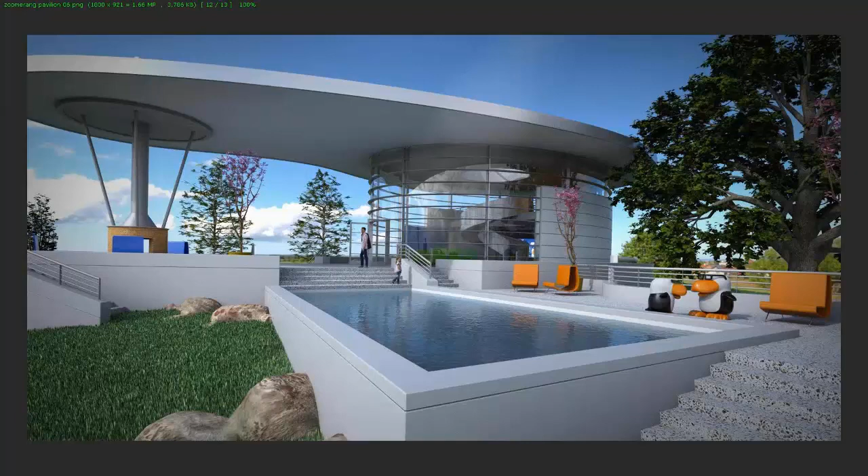Let's take a quick look, I think I have one rendering. Yeah, this magnificent oak tree here in the background was from SpeedTree, I believe the website's speedtree.com. I just didn't use them for this webinar because it's so much data and it slows everything down, and it includes these rocks. If you have to be photorealistic and close up, there's no better company than SpeedTree. I think they have an application where you can design your own tree. They've been used in a lot of movies and video games. I've played around with it a little, but it's amazingly complicated. This is actually one of their sample products.

So that's SpeedTree, I think that's it for the stuff I used. Most of the other things, oh, I can mention the people - that's what I classify as entourage. I consider the ground, the trees, and the people all entourage. Those are from AXYZ Design. We can maybe throw all these links into the show notes.

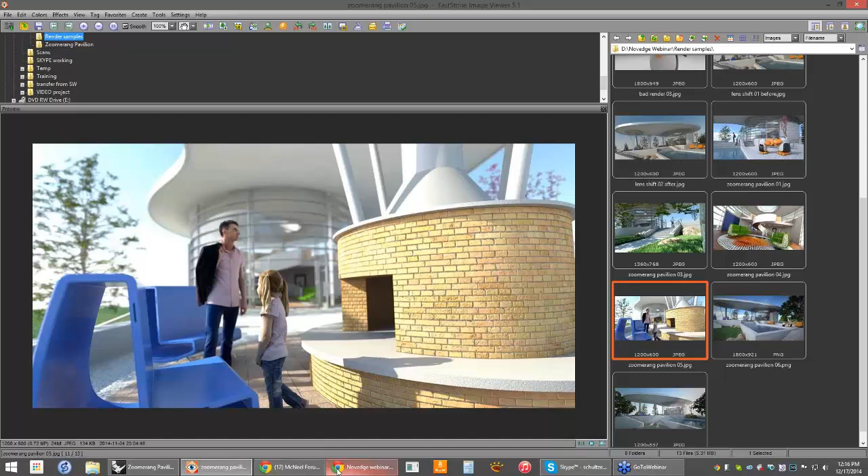Actually, I just remembered I do have them listed in one place. If you go to my website, I put all my recommendations in one spot. If I go to my Lynda.com courses, here's the most recent course - everything I've talked about today is explained much slower and in greater detail if you watch it. But here's all the partners: I used Viz People for the HDR skies we saw, Dosch Design was for the trees and materials, SpeedTree was for that super high-res tree, and the people are from AXYZ Design. Those are right there on my Professor 3D website with direct links.

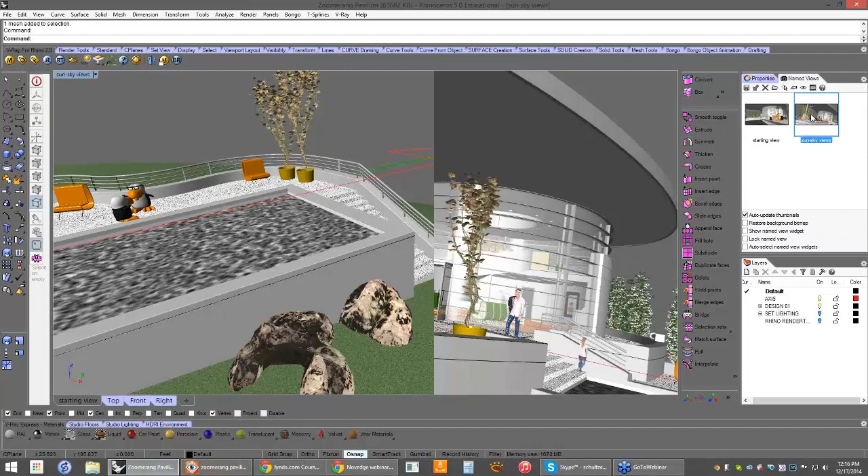That is fantastic, Dave, you couldn't have answered better. I just got a lot of responses to the proposal of webinar part 2, and overwhelmingly everybody's typing in yes, yes, yes. So I'm going to hold you accountable for that. Okay? You can't get out of this? No, you can't. Right, okay.